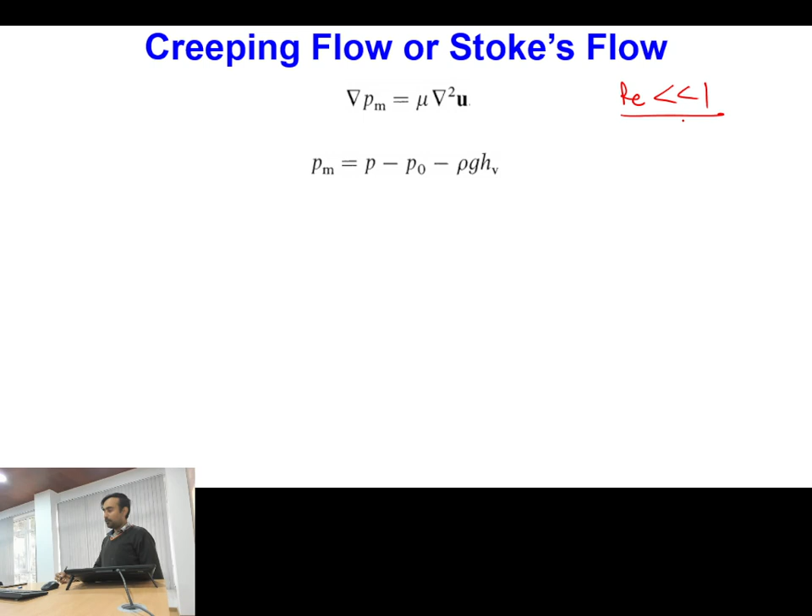So, a little bit of idea I already gave you in the previous class: if the Reynolds number of the flow is very small in comparison to 1, it means viscous forces are significant in comparison to the inertia forces, then particularly the advective terms of the momentum equation can be avoided, and we can simply write that the pressure gradient, particularly the modified pressure gradient, is directly equal to the viscous forces.

Okay, here the definition of modified pressure is included, and once we take the divergence of this equation, we get Laplacian of modified pressure is equal to 0, and once we take the curl of this equation, we get Laplacian of rotation field is equal to 0, and ultimately rotation can be written as minus Laplacian of stream function, and this gives the biharmonic equation where del 4 psi is equal to 0.

So ultimately, if I have creeping flow or Stokes flow, these are the names given for Reynolds number less than 1, and if this flow is over a sphere, then I can simply use the axisymmetric assumption, and under this assumption, because I can utilize the stream function, this single equation will be applicable as a replacement for the momentum equation, and continuity will be satisfied by default.

Okay, so now this equation we will try to apply for a rigid spherical particle. When I am talking about the rigid particle, I am particularly referring to a solid particle, because a fluid particle will always be a deformable particle, not a rigid one. So whatever analysis I am proposing here is applicable for a solid particle, because that will be the only rigid one.

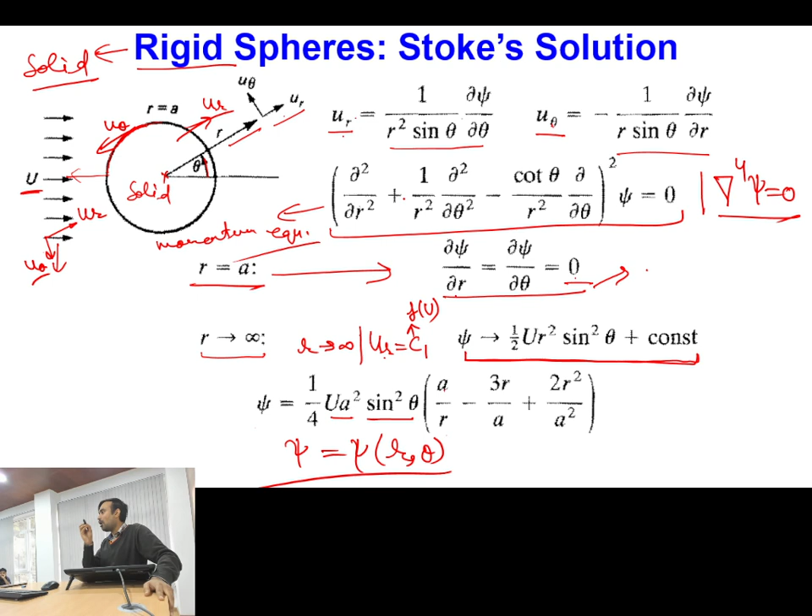So you can simply say that psi is becoming a function of r and theta. So in this equation, if I substitute different values of r and theta, then I will be able to determine the value of psi in the entire portion around this sphere, and then if I join all the points with constant value of psi, that will be giving my streamlines. Is this one clear?

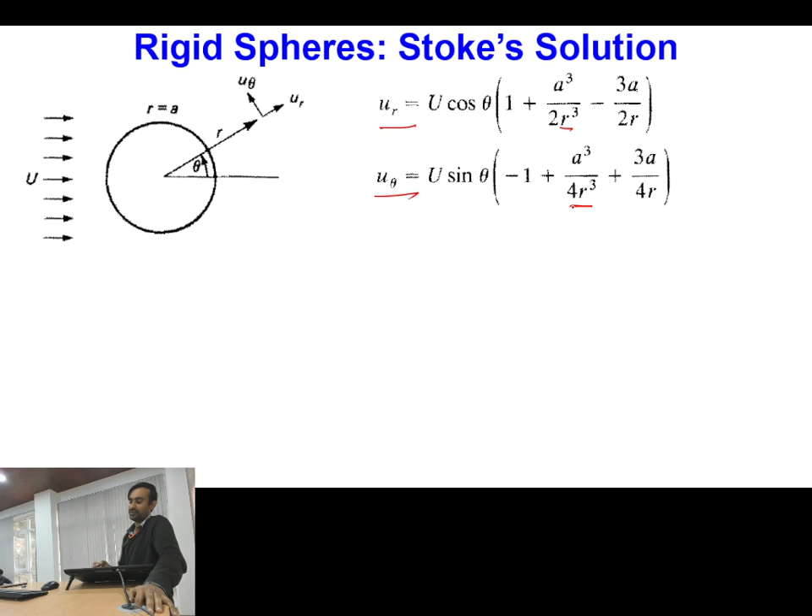Now, if you have got the value of this function psi in terms of r and theta, then you can take the derivatives del psi by del theta and del psi by del r, and then you can determine the corresponding values of radial and tangential velocities. So these radial and tangential velocities are also functions of r and theta. So at different values of r and theta, you now have the velocity field known.

Once you have the known velocity field, can you tell me how to determine the pressure field? How to determine pressure field? Continuity equation? No. We are not solving the continuity equation; that is by default satisfied for the stream function. So if I know this velocity field, how to determine the pressure field? Because this is a viscous medium, I cannot apply Bernoulli equation here. That is applicable for inviscid medium, irrotational flow.

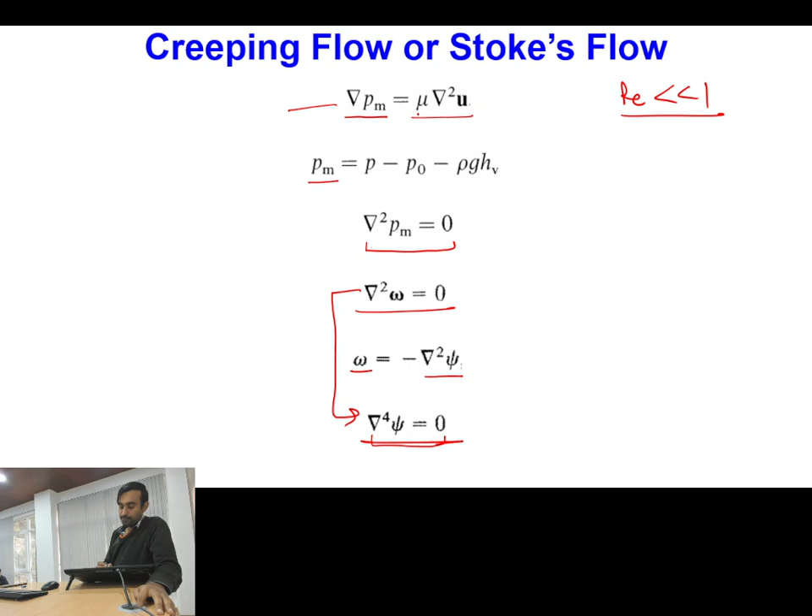Momentum equation, yes, correct. So if you now go to your original form of momentum equation, what was it? It was having mu times Laplacian of the velocity field on the right hand side, and on the left hand side it is the gradient of the pressure field. So if you know this velocity field, your right hand side is actually known to you. Once the right hand side is known, we can simply calculate the left hand side. Is this one clear?

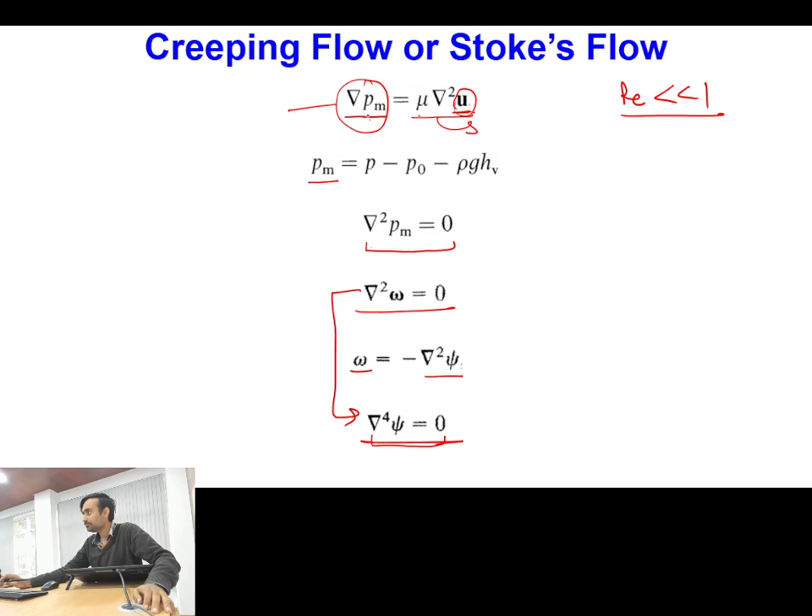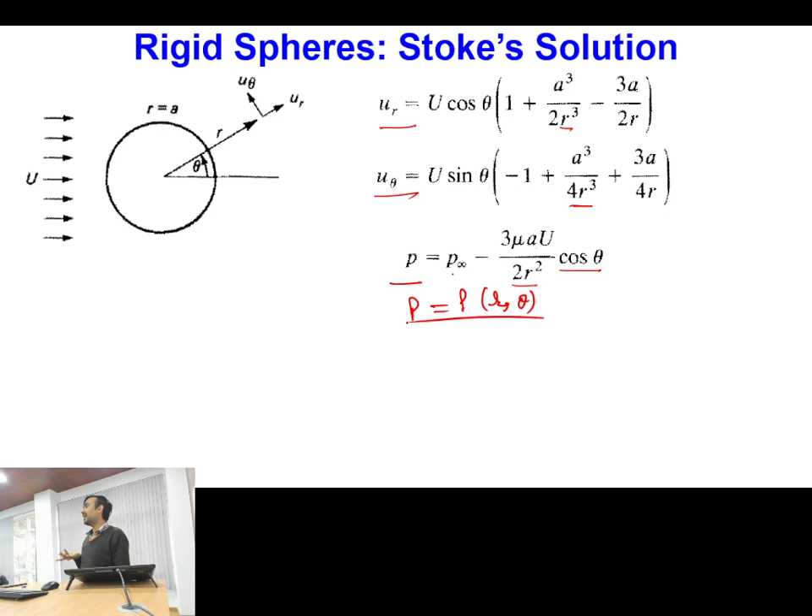So by using the original momentum equation, you can actually calculate the value of the pressure field, and if you calculate the value of the pressure field, it comes out to be P infinity minus 3 mu A u divided by 2r square into cos theta. So again you can see your pressure is nothing but a function of r and theta. Because our entire system is in r theta coordinates, at different values of r and theta I can also predict the value of pressure as well.

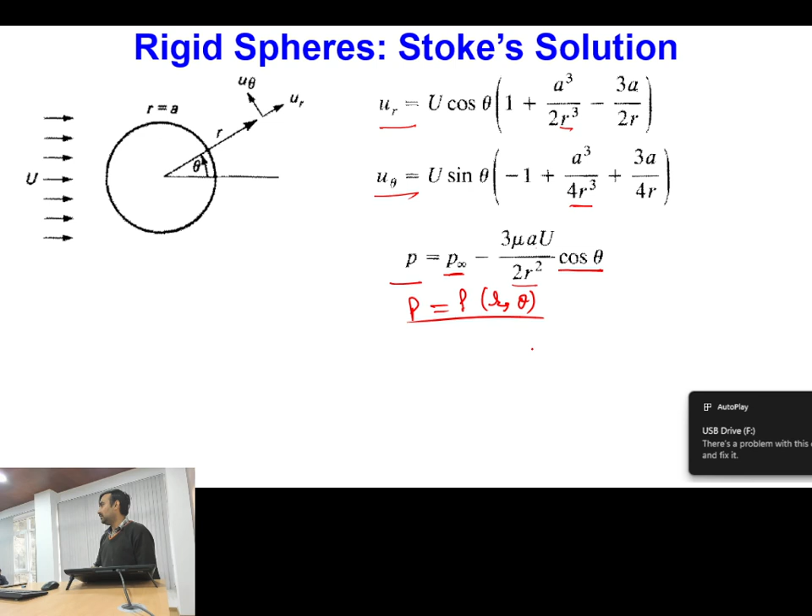This time, one distinction from the potential flow theory: you will be finding that here this pressure is nothing but an odd function. Because of this, pressure in this sector and in this sector will actually be different. Same or different? So this is an odd function, not an even function.

Cos theta from 0 to 90 degrees will be positive, and from 90 to 180 negative. So because of this odd function, you will have different values of pressure in the upstream and downstream directions. Once you have different values of pressure, it means you will be experiencing a net force because of the pressure term, which we call our form drag.

So now, this pressure will give you which type of drag force? This will give you nothing but form drag. And we have one more drag force. What is that? That is nothing but skin friction drag or viscous drag. So to calculate viscous drag, what do we need to do? We need to calculate the wall shear stress.

So in order to calculate the viscous drag, we need to calculate the wall shear stress. Of course in this case I can simply say wall shear stress. Otherwise, if I use the nomenclature of multiphase flow, I should call this interfacial shear stress, because this is a particle and this is the fluid. This boundary is the interface between the fluid and the particle, so I should know the interfacial shear stress.

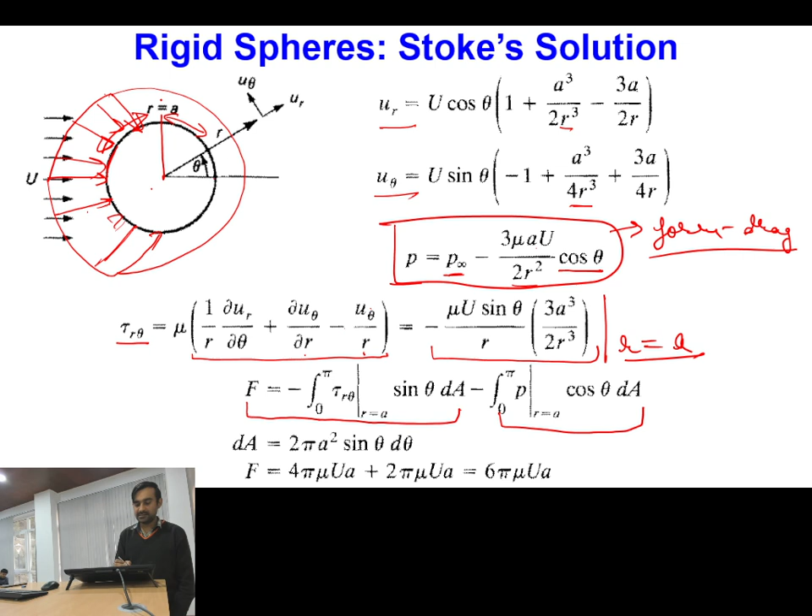So using the value of this interfacial shear stress as well as the pressure term, what can I do? Say I have some pressure distribution at this surface, something like this. It will be acting on the entire structure. So what will be happening? Pressure at every point is varying at different values of r and theta, and I know how pressure is varying. This function is nothing but a function of r and theta.

Now if I take dA as some elemental area, and corresponding to this elemental area I take the value of pressure and then its component parallel to the flow, because right now I am trying to calculate the drag force. When calculating the drag force, I consider the component parallel to the flow direction. So parallel to the flow direction, the component of pressure is the value of pressure at r equal to a, cos theta, times elemental area dA.

And I am doing this integration from 0 to pi, so for half of the portion actually. This portion gives me my form drag. Then similarly I need to do the integration of the interfacial shear. Interfacial shear multiplied by its component in the flow direction, multiplied by area, will give me my skin friction drag or viscous drag. And typically this elemental area dA over here, you can see, what is the area of a circle?

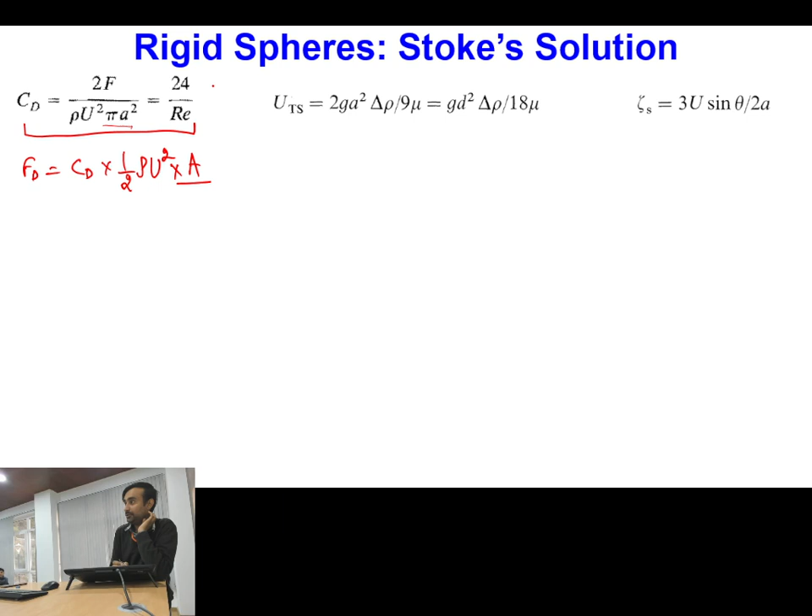So from here I can write Cd is equal to 2F divided by rho U square into pi a square. So you have the value of F as nothing but 6 pi mu Ua. So if you substitute this value 6 pi mu Ua and define your Reynolds number as rho U into 2a by mu, so if you take diameter as your length scale for estimation of the Reynolds number, then you will be finding your drag coefficient to be 24 by Reynolds.

Okay, and now what we need to do, we also need to estimate that if in the flow field, I am saying that the particle, either fluid or particle, is moving actually at constant velocity. So ultimately what is happening? Particle is not having any inertia in the creeping flow situation. So the only forces which will be coming into account are driving force and the resistance force. And resistance force is because of the pressure and the shear stresses, which is coming as drag force. Okay, and the driving force for the particle will be nothing but its weight.

Okay, so if I do the balance of weight and the drag force, what will be the value of weight? 4 by 3 pi a cube into density of the particle, but ultimately density of fluid is also coming into picture. So I have to take the buoyancy force. So when I do the buoyancy force, I will be writing delta rho into g. So this is the net driving force. When this net driving force is equal to the net resistance force, which is nothing but 6 pi mu aU, once I do the balance of these two forces, then ultimately I will be able to calculate

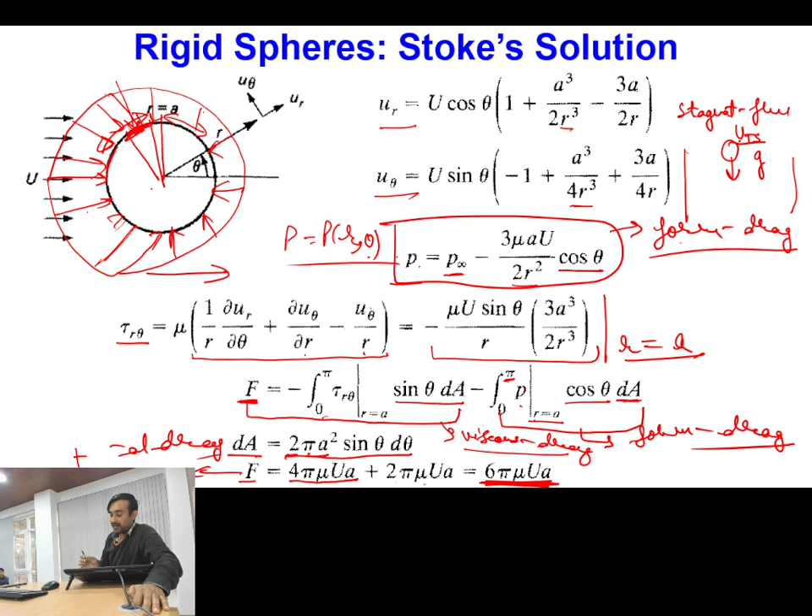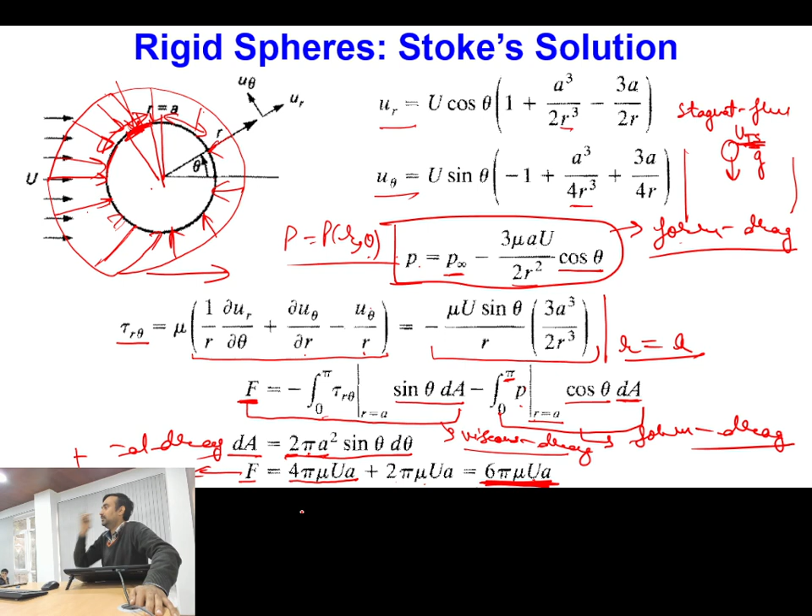Okay, so in this scenario, whatever drag force the particle will be experiencing, that will be 6 pi mu a u, but in place of this u I will be having uts. Is this point clear? So I am making an analogy from this to the free fall situation of a particle. Okay, is this one clear now? Are you clear with this idea?

So here this uts is the free fall velocity of the particle, which is a uniform velocity. Say you have an infinite fluid medium and you drop the particle at t equal to 0; first the particle will be in an accelerating mode, and after that it will achieve a constant velocity. I am not talking about the accelerating phase, only the portion once it has achieved uniform velocity. Corresponding to that, the terminal velocity of the spherical particle will be g d square delta rho by 18 mu.

And if you calculate the vorticity at the surface of the particle, zeta s is equal to 3u sin theta by 2a. Whenever I am talking about the surface of the particle, r is already substituted equal to a. That's why in this formulation you only see the variation of theta but not of r. Is this point clear? All are clear with these points?

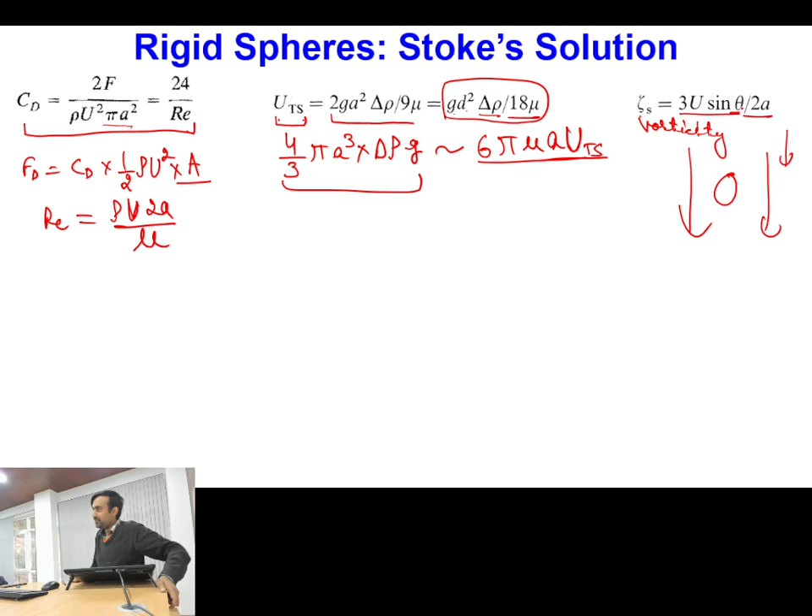So in the previous slide I discussed the case where you have a solid particle and fluid is moving over it at uniform velocity. When I defined the terminal velocity, I considered just the opposite situation: I have a stagnant fluid and the particle is actually falling. So the terminal velocity of that particle is shown over here. Okay.

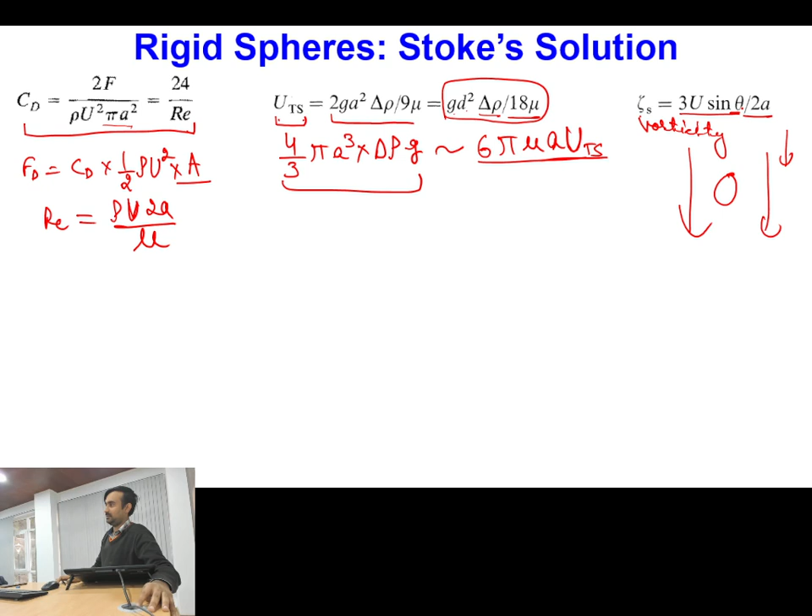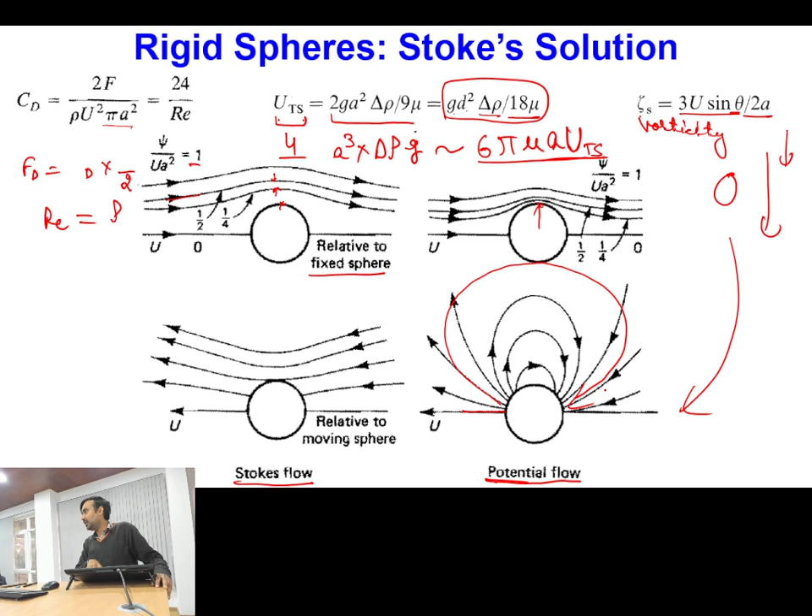Now, instead of this solid particle, if I have a fluid particle, it means that now my particle will not be purely rigid. So the particle can also have relative motion at its different locations. Once the particle is having different motions, then what will be happening? Other than the kinematic boundary conditions, now dynamic boundary conditions will also come into account.

So if we say that within the particle also some motion is happening, we now have relative velocity between this motion and the outside motion. If we have some relative motion, then ultimately there will be interfacial shear. And at the same time, if inside also I have a fluid, this fluid will be applying a certain amount of pressure and viscous normal stresses from inside, and outside also I will be having certain pressure.

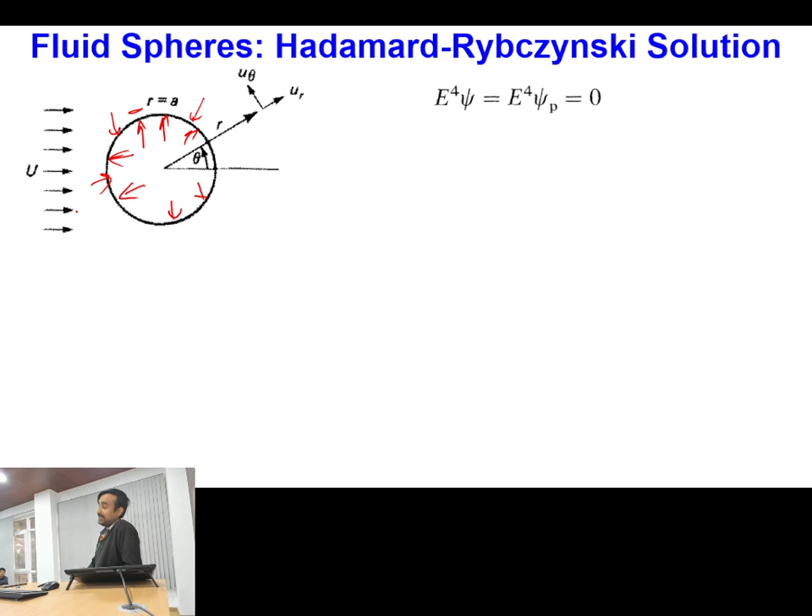So this difference of pressure, meaning the forces acting normal to the interface, should also be taken into account. Because if these forces are not considered, then we cannot ensure that the shape of the particle can remain the same. Is this point clear? So now in place of the solid particle, we have the fluid particle. So we have additional complexity that along the interface of the particle we have to balance the tangential and the normal forces. These two additional boundary conditions we have to satisfy.

Okay. So considering this, again the same thing is there. You can see this E symbol is nothing but a replacement of the symbol delta, because these equations are taken from different texts, so the nomenclature is also coming from different books.

Okay, so now one important point: whenever I am writing this equation delta four psi equal to 0, I am not writing it solely for the continuous medium. I have also written psi p. It means that within the particle also there will be some flow field. So I have to define psi for both the particle as well as for the surrounding continuous medium.

Okay, so this solution was independently done by Hadamard and Rybczynski. These two persons initially did this solution independently, but it is now commonly joined with their names, because they did this solution at almost the same time.

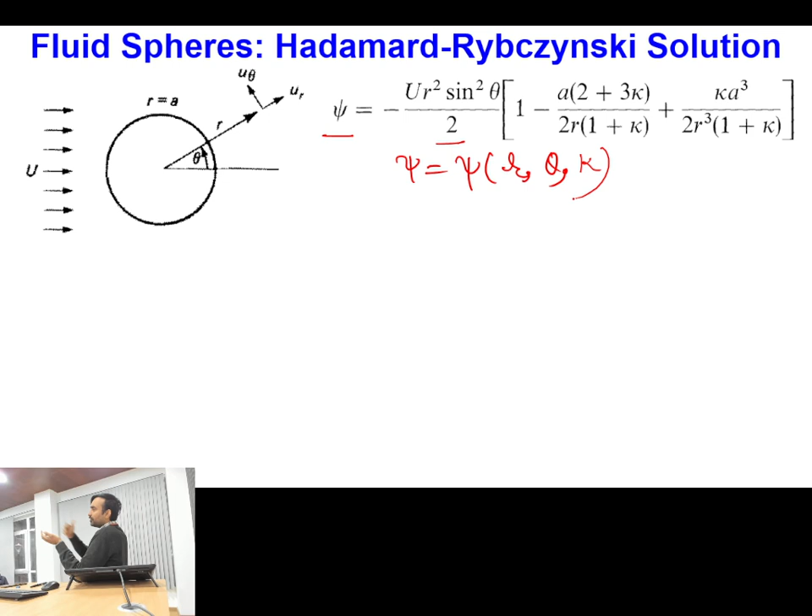Now psi is a function of r, theta, and one more variable, that is k. What is k? K is nothing but viscosity ratio. Because with different fluid combinations, the viscosity of the particle and viscosity of continuous phase can be different, and depending upon that your value of k will be different. Is this one clear?

Similarly, I can also solve this equation within the particle. Whatever solution of psi I get within the particle, I will be writing as psi p. Is this one clear? So I am solving psi outside the particle as well as within the particle. Okay.

If I have these two, then how can I find pressure? Using the fifth boundary condition. So one way is I can calculate pressure using this fifth boundary condition. Other than this, can I find pressure some other way? Yes, I can go back to my momentum equation, and from momentum equation also I can find the pressure. Why am I saying this? Because here we have one very important conclusion.

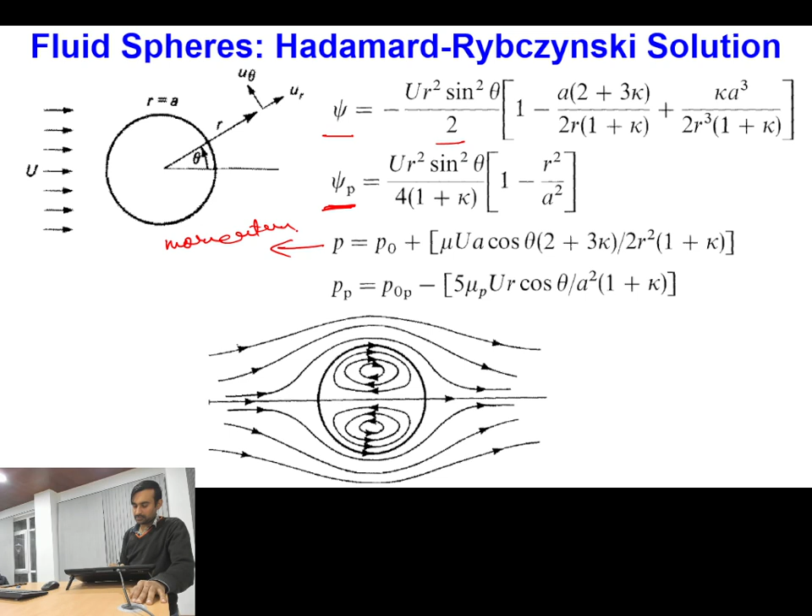So one pressure I can calculate from the momentum equation, and one pressure I can calculate from the fifth boundary condition. Is this one clear? Now, my surface tension pressure was considered in which boundary condition? The fifth boundary condition. And all other 4 boundary conditions nowhere involved the value of surface tension.

But the solution we are calculating is subject to the boundary condition that there is no flow across this interface. If I don't have any flow across this interface, my shape of the particle is remaining intact. So for smaller particles to be of spherical shape, surface tension does not matter. Whether surface tension is small or large, the shape of the particle can stay spherical. Is this one clear? Is this making sense?

And at the same time, if the pressures calculated without considering the surface tension and with considering the surface tension are matching, then I can say that surface tension is not leading to any change in shape of the fluid body. Are you getting this point or not?

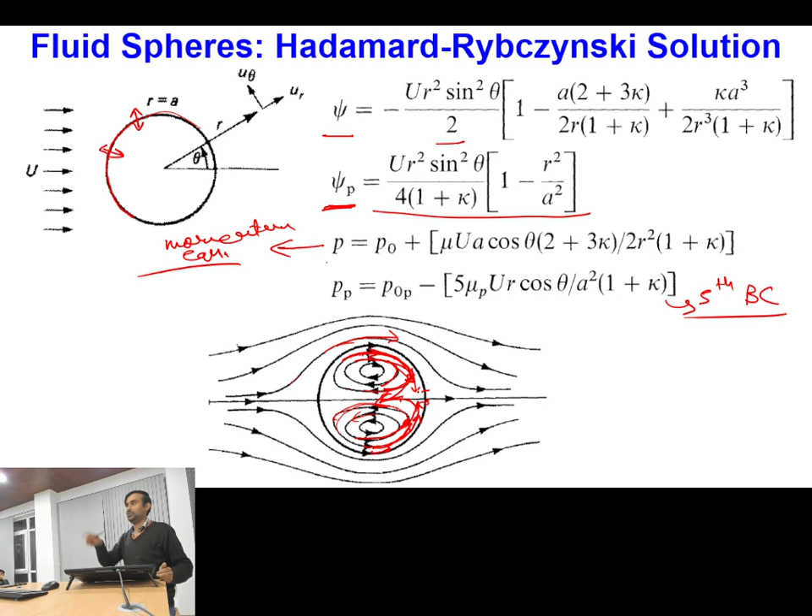So here you can make the comparison for different values of viscosity ratio. So K is 0. K was nothing but mu P by mu, where mu P is particle viscosity. So K = 0 means your continuous phase viscosity is extremely high in comparison to particle viscosity. You can consider this like an air-water system: say you have an air bubble and outside you have water as liquid. Air viscosity is very low in comparison to the viscosity of water, so you will be having this type of system.

So if you increase the value of K, what is happening to your flow field actually? That is shown over here. Is this one clear? What is shown here? Can you observe these streamlines and then tell? If you see this portion, the internal circulation pattern is almost the same. But if you see outside, this gap is actually more widened in comparison to this gap. So you have different surface curvature upon change of the viscosity value.

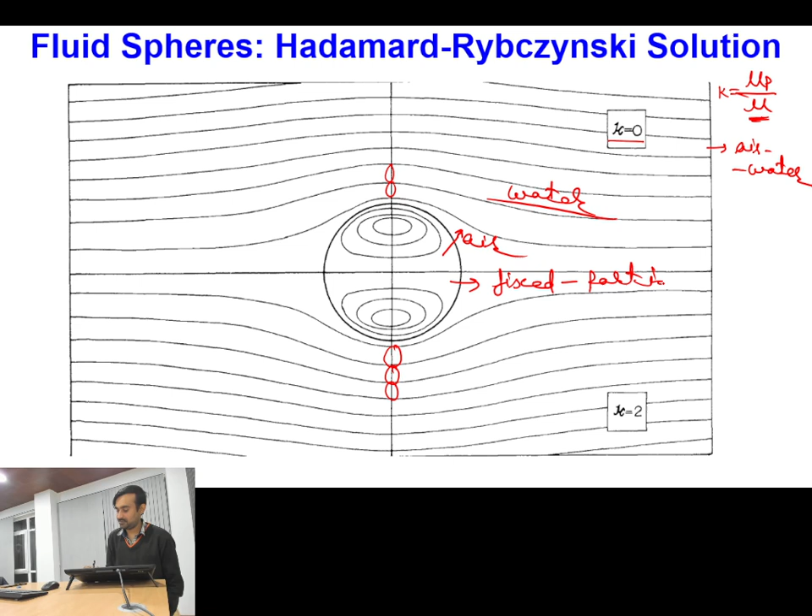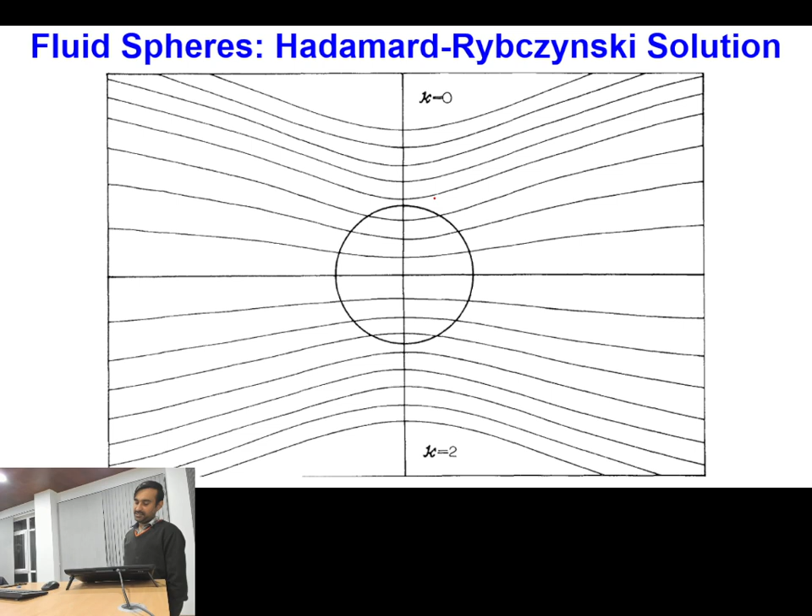You use different fluid pairs. First you take an air-water system, then air-glycerine, then any other immiscible fluid medium. Just change the properties between the fluids. So this was for a fixed particle, and flow is happening over the particle. If you have the other situation where your particle is actually moving and in the surrounding you have stagnant fluid, then you will find streamlines something like this. Then one interesting point.

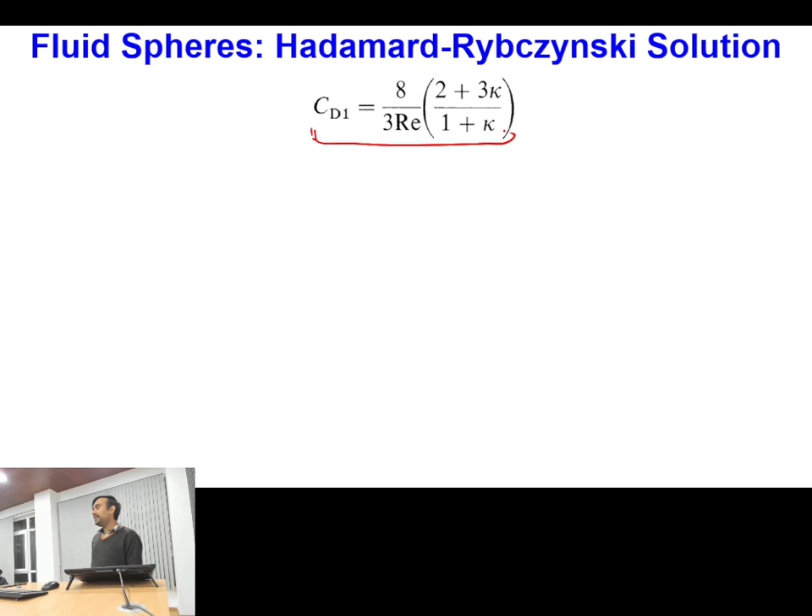Now what we need to do? We need to calculate again the drag forces. If I calculate first the form drag, I can calculate it from the pressure distribution. And if I write form drag divided by half rho u square, that will be nothing but my CD. So this I am calling the form drag coefficient, CD1. CD1 now has one addition: the viscosity ratio K is also taken into account.

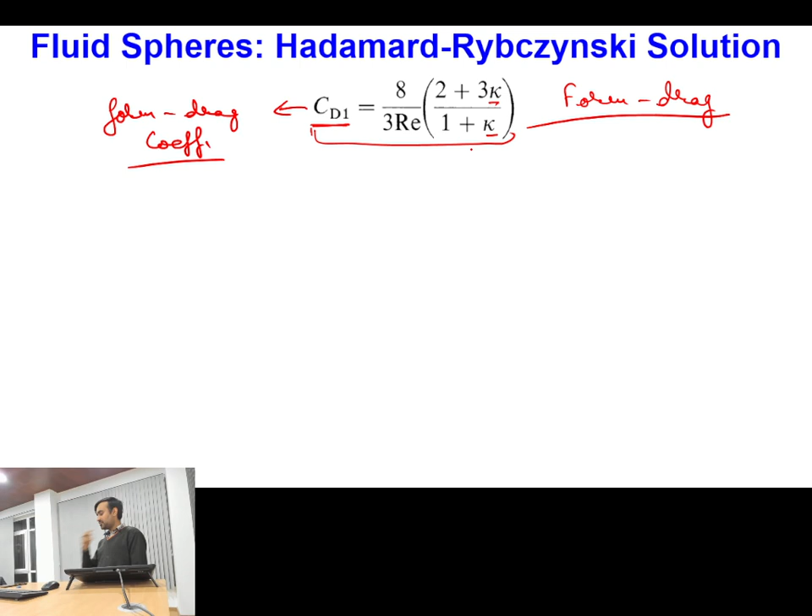Then this is CD2. CD2 is nothing but the normal component of viscous drag: viscous drag due to the normal portion of the deviatoric stress tensor. Then third, I will be having purely because of the shear, so that is viscous drag due to the shear component.

Now my total drag coefficient will be something like this: 8 by Reynolds number times (2 + 3K)/(1 + K). If the value of K is equal to 0, or infinity, what will happen? If K is equal to infinity, it means particle viscosity is infinite, so it is identical to a solid particle. Then this limiting case becomes 24 by Reynolds number, and this particular component will actually vanish. I will have only the drag force because of the tangential component and the pressure component; the normal stress will not contribute. This is just a limiting case.

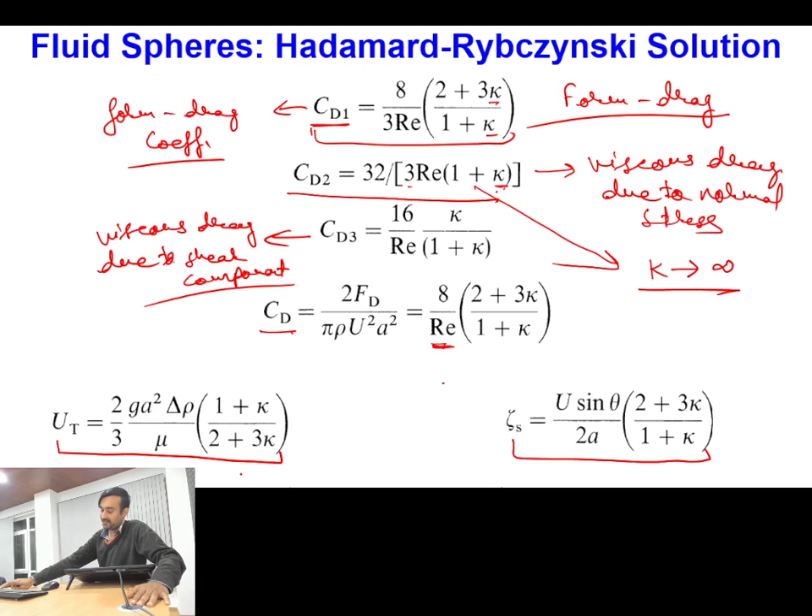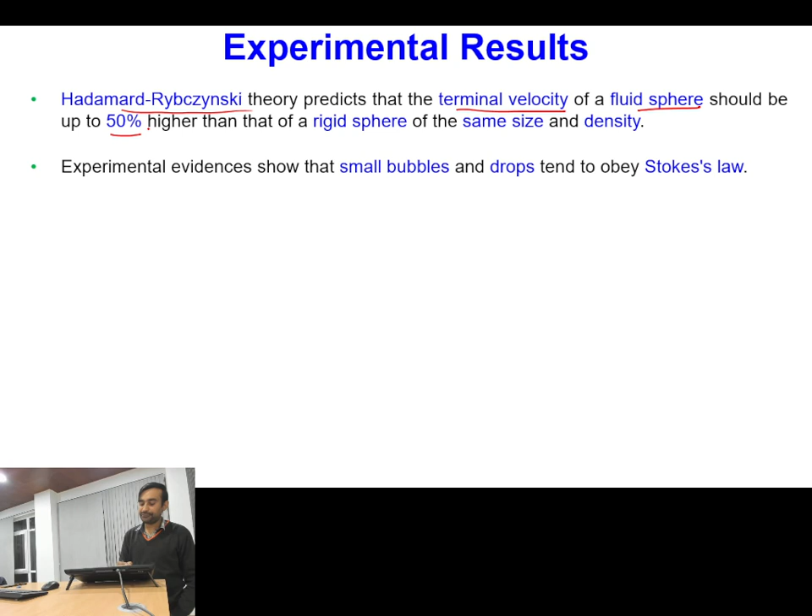So for a fluid particle, the Hadamard-Rybczynski theory predicts that the terminal velocity of a fluid sphere is almost 50% higher than that of a rigid sphere for the same size and density. So if you use a spherical fluid particle or a solid spherical particle having the same size and density, the fluid particle should have more velocity than the solid particle. And what is responsible for more velocity? Internal circulation is responsible, because it is favoring the flow direction, in contrast to what is happening in the case of a solid sphere.

In case of solid sphere, when fluid is moving across the interface, then fluid velocity just at the interface is actually exactly becoming, yes, relative is 0 in both cases. Okay, relative is 0 in both cases, but if you see, the particles of the fluid medium are actually moving through these vortices. So these will be favoring and decreasing the interfacial shear.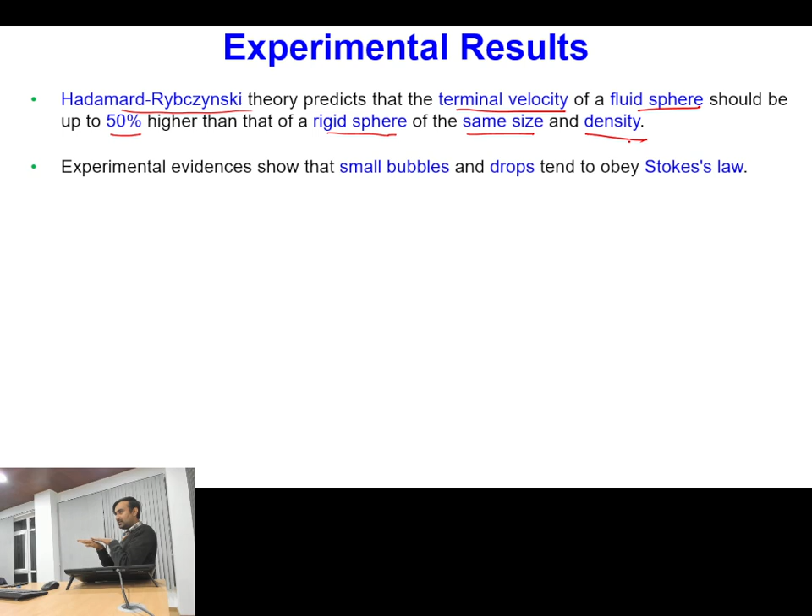On contrary, if you see in other case, particles are rigid, so there you will be experiencing more resistance. Okay, so it means internal circulation is responsible for decreasing the drag force and increasing the velocity. So internal circulation present in fluid particles is responsible for decreasing drag force and increasing the terminal velocity.

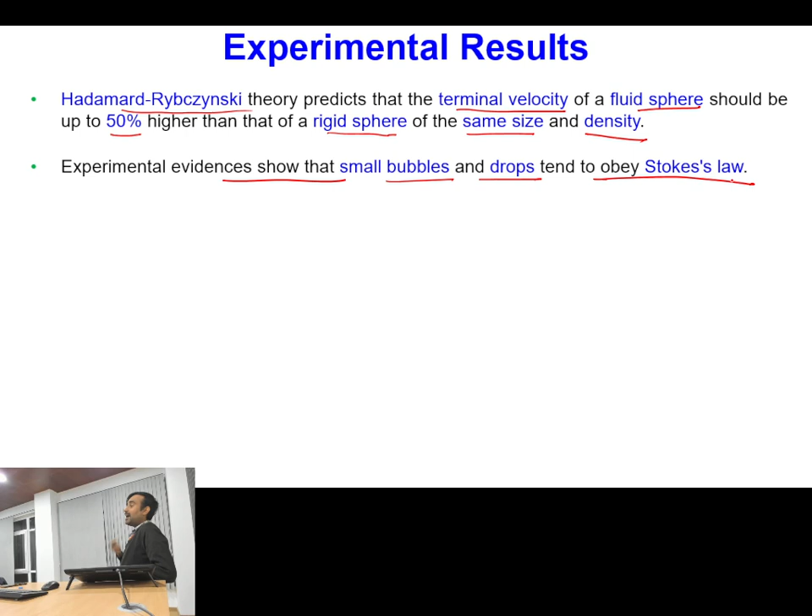Then second point is, this is very important observation. Experimentally it is observed that small bubbles and drops tend to obey Stokes' law. So theoretically we are getting that this should have higher velocity, but experimentally whenever the measurements are done, it was found that the value of velocity is actually more approaching towards the Stokes result. Okay, so now what can be the difficulty?

Yes, if internal circulation is not happening, or there is some deviation in the internal circulation from its exact structure. Okay, so what are the possibilities of deviation? Yes, this is very important point. So whenever we have derived this solution, we considered that interface should be surfactant free, contaminant free. But in real scenarios, every time we will be finding that interface is not actually contaminant free.

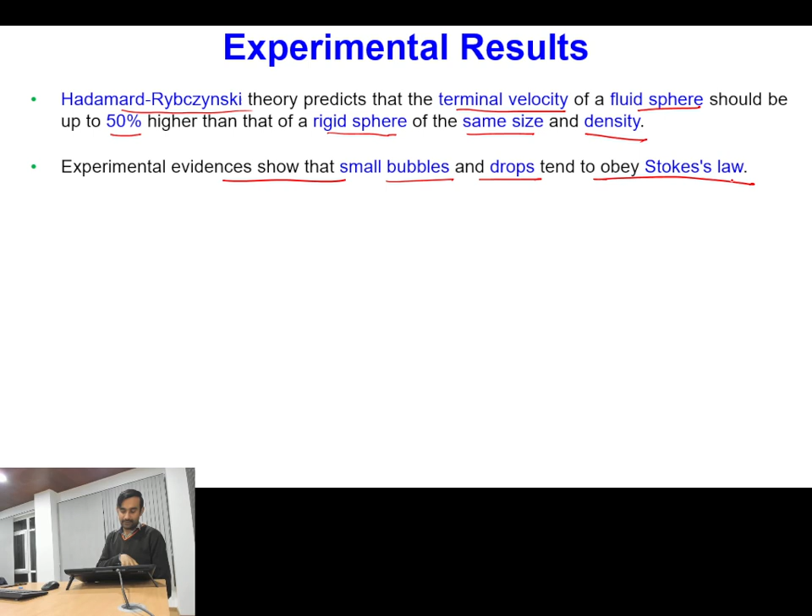So once the interface is not contaminant free, then what will be happening? The internal recirculation pattern actually will be disturbed. So once we have disturbance in the internal recirculation pattern, of course, it will be actually leading to changes in the value of terminal velocity. Okay, so there are 3 different postulates which have come to explain this anomaly.

So first postulate was given by Bond and Newton, and they mentioned that in case of small fluid particles, they follow Stokes' law, but when we increase the diameter, the velocity approaches towards the Hadamard-Rybczynski value. Okay, so it means upon increasing the diameter, they are saying that these are approaching towards this value. So what was their hypothesis?

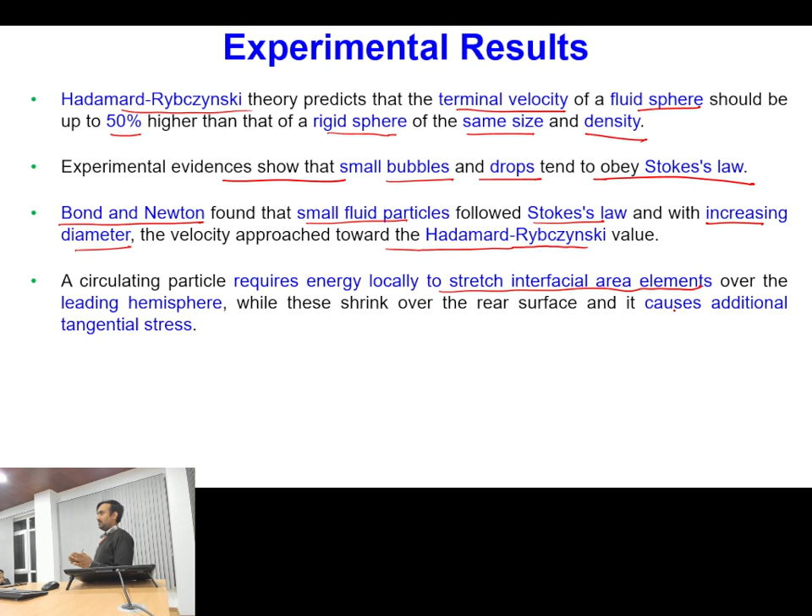Their hypothesis was that a circulating particle requires energy locally to stretch the interfacial area element. So interfacial area element will remain in its stretched position once the internal circulation is investing certain amount of energy in maintaining its free surface, its interface shape. So once this energy is being invested, it means we will be having some additional tangential stresses.

So this was the first theory, and based on this theory this criteria was given the name Bond criteria: if my Bond number is greater than 4 for a fluid particle, then only it will be having Hadamard velocity, otherwise it will be approaching Stokes velocity. Okay, so though this particular criteria was having sufficient accuracy, there were certain cases where this criteria actually was not working.

People have done some specialized experiments where they have given ultimate care to make the interface surfactant free, contaminant free. So in that pure case, even if your bubble or drop Bond number is less than 4, they were approaching the higher velocity. Okay, so that's why in certain cases this theory was not actually working.

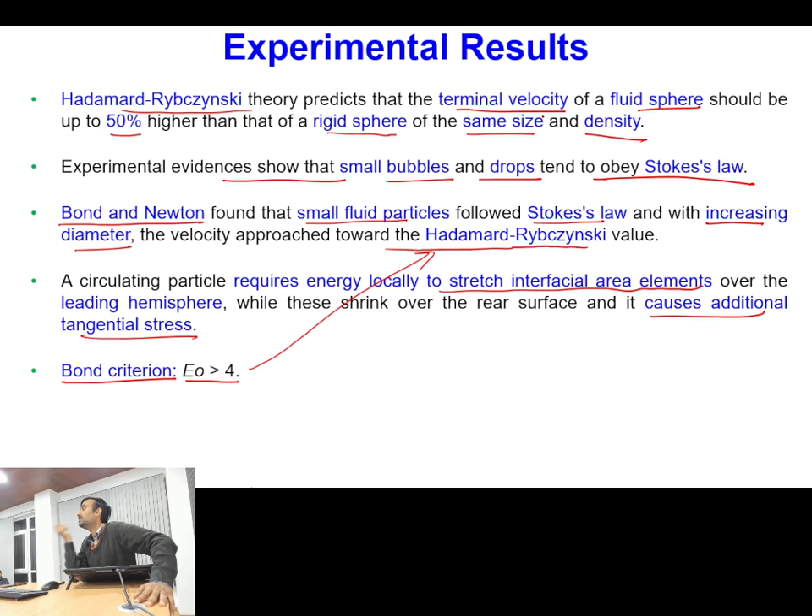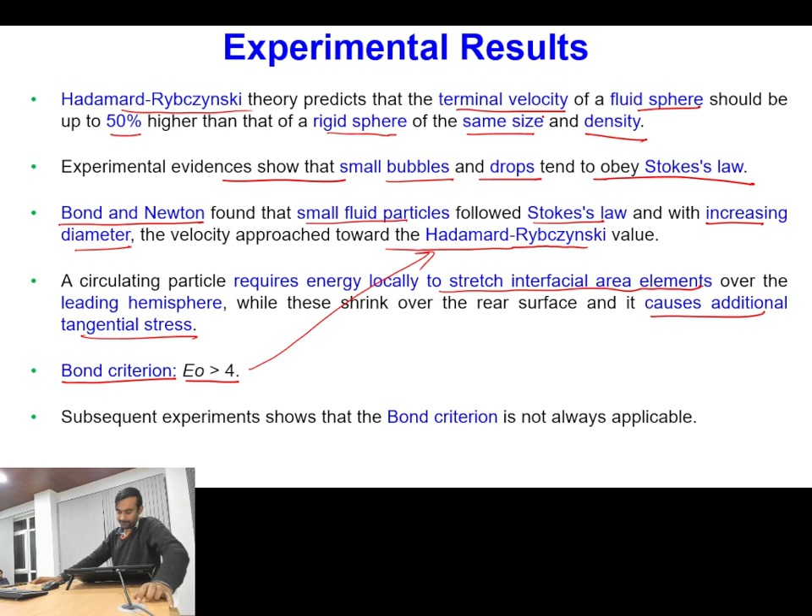And in certain cases, people have actually added impurities from outside, such impurities which are not changing the surface tension. For example, some known solid particles were added which cannot change the value of the surface tension. Okay, so with these particles it was observed that there is no change in the value of velocity. So it means size is not a strong criteria. So then it was concluded that Bond criteria is not always applicable for all cases.

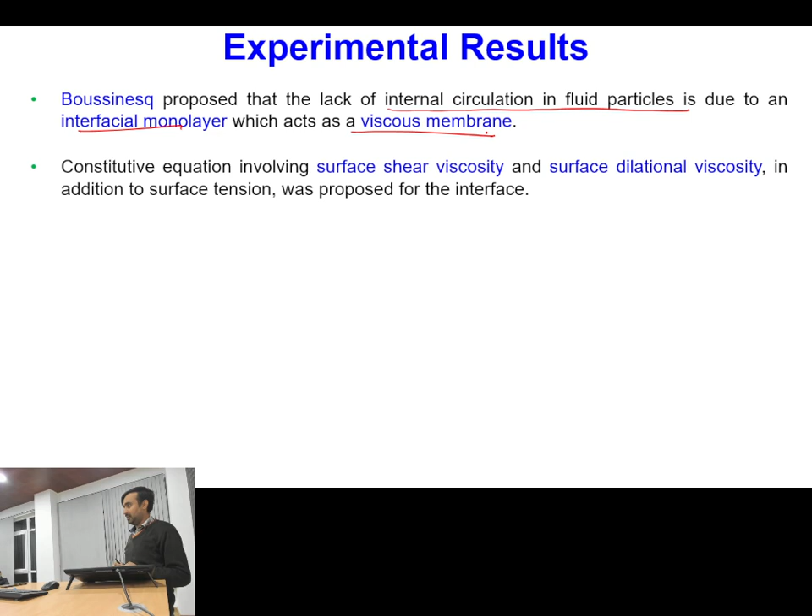Then subsequent research was done, and Boussinesq proposed lack of internal circulation in fluid particle due to interfacial monolayer. So it means at the interface we have formation of some viscous layer which is allowing some particles very close to the interface to remain stationary. And only surface tension cannot explain the complete interface rheology, but some additional viscosity should be accounted for, which is called surface shear viscosity.

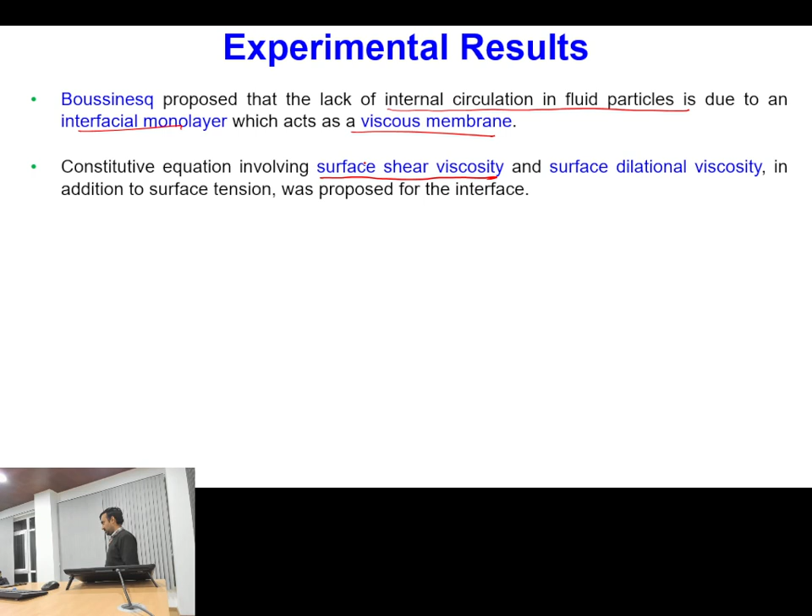Okay. By considering this surface shear viscosity, they have given the value of terminal velocity. So this was identical to that of the Hadamard relation.

Only one addition was C by mu, where this C is nothing but equal to the surface dilatational viscosity divided by 1.5 times the radius. So C means some factor which is accounting for the additional viscosity layer at the interface.

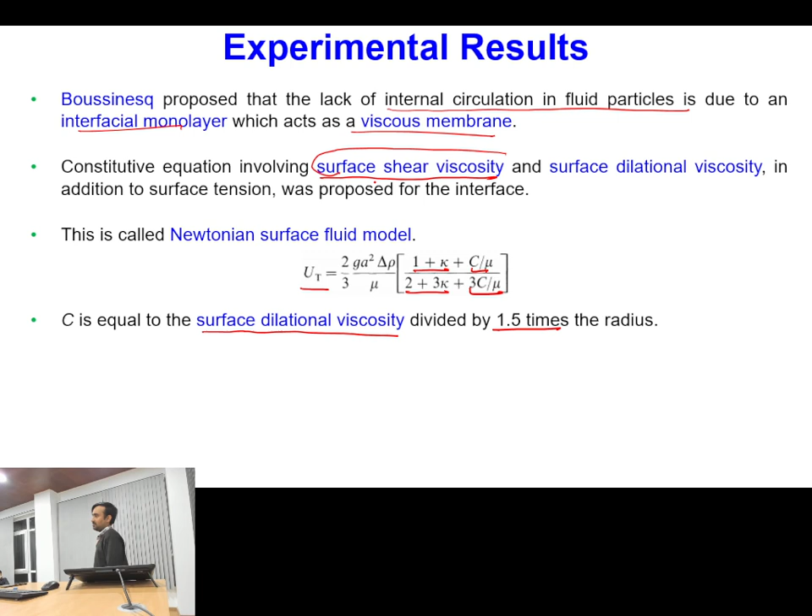So this was the second theory, but this theory has not become very popular because it is not very easy to determine surface shear viscosity. Surface dilatational viscosity is not very easy to calculate, so it was difficult to make reliable measurements of the surface dilatational viscosity.

So another theory came which mentioned that if we have some surface active substances present on the interface, then these substances tend to accumulate at the rear portion of the interface, thereby reducing the surface tension. So if you have some particles present in the medium which are not soluble in the bulk fluid medium, where will these particles settle? These will settle at the interface.

If you have some particle within the fluid medium which is not soluble, it will try to move away from the bulk of the medium and get accumulated at the interface. So once particles are collected on the interface, and this drop starts moving in the upward direction, what will happen? These leading particles will be displaced to the rear end.

So you will find that the top portion will be particle free, pure, and in the rear portion you will have accumulation of the particles. Is this point clear? Once this interface starts rising upward, the leading edge will have some recirculation, so the particles will mostly accumulate near the back portion. So the top portion will have high surface tension and the back portion will have low surface tension.

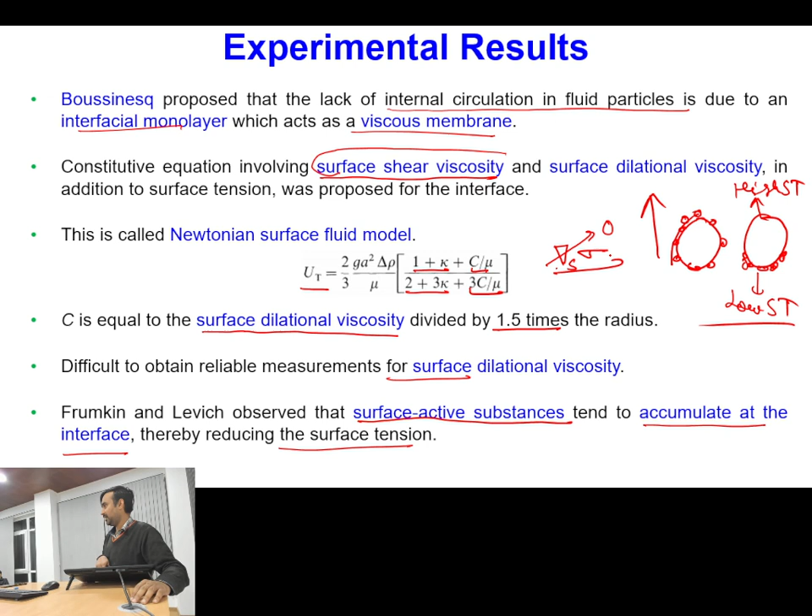So if you have this difference of surface tension, then in our theoretical analysis, the term in one of the boundary conditions, del S sigma, that we made 0, is not a correct assumption. We have to account for that variation of surface tension. It was found that these surface active agents are swept to the rear portion, leaving the frontal portion relatively uncontaminated, and the gradients are more pronounced in small bubbles and drops than in larger bubbles.

So the gradient of the surface tension because of the accumulation of the particles is not much stronger in the larger particles, but in smaller particles these gradients are stronger. That's why smaller particles, because of this gradient of surface tension, slow down and approach velocities close to the Stokes velocities.

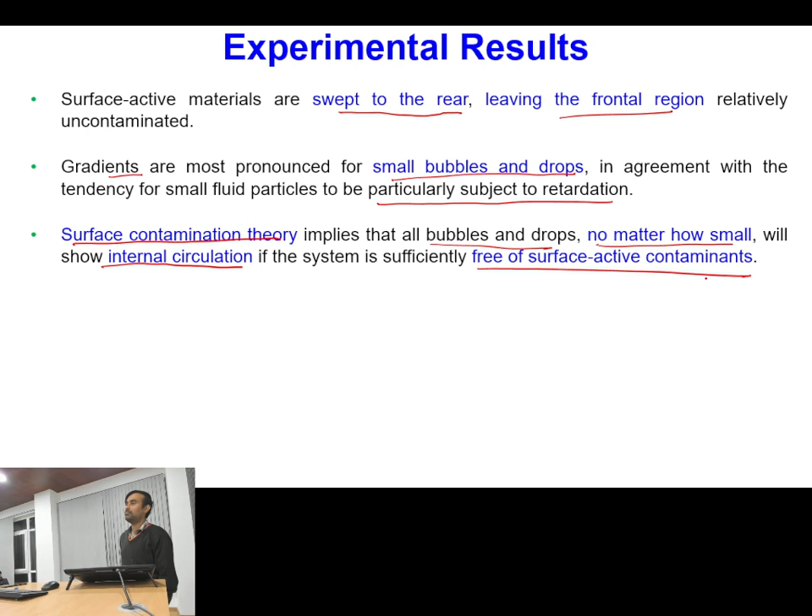And so surface contamination theory tells that for all bubbles and drops, no matter how small, we will have internal circulation if the system is sufficiently free from contamination. When people made pure contamination-free systems, or included particles which do not interfere with the surface tension, they were able to see the formation of symmetric rolls.

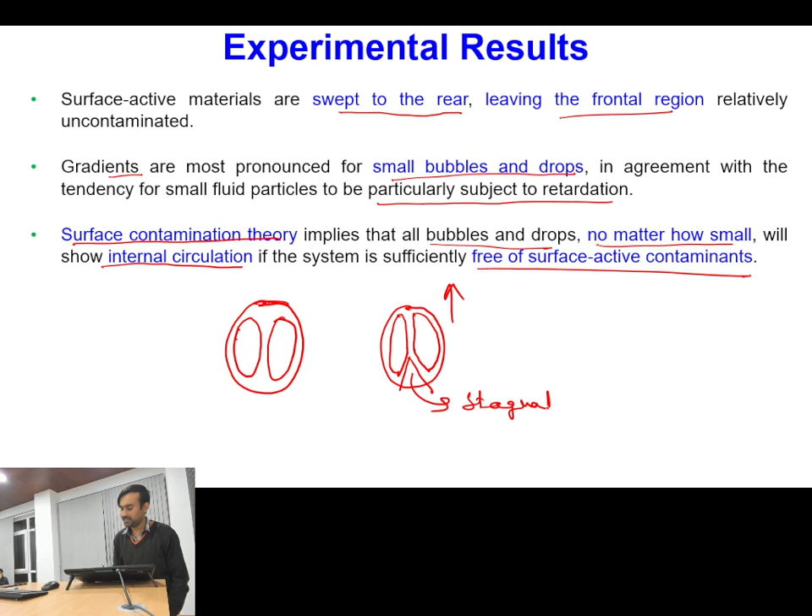But when contamination was introduced intentionally, it was found experimentally that if this is moving upward, the roll formation is something like this. So here you have some stagnant fluid portion. The fluid particle has recirculation, but that recirculation is deflected from its rear end and bends like this, and you have some portion behind this bubble where there is stagnant fluid.

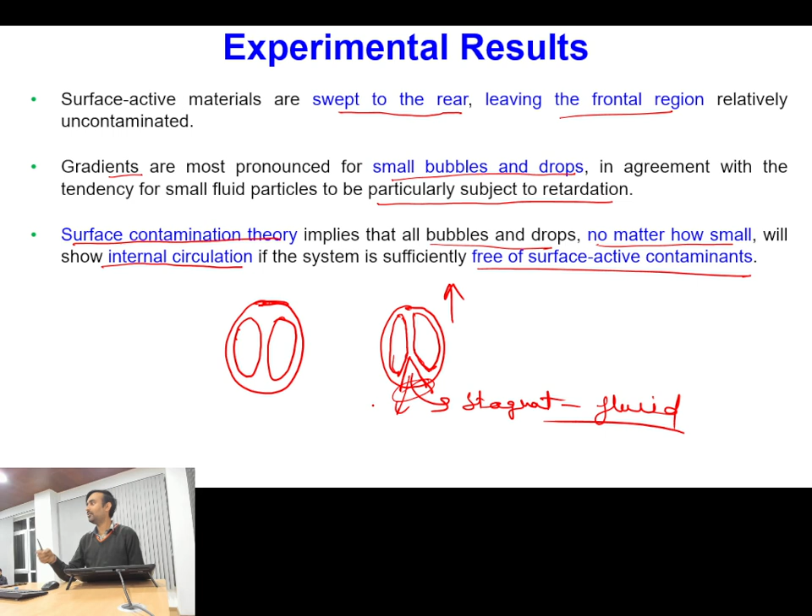So that stagnant fluid is responsible for the increased forces, leading to retardation of the bubble velocity. How this surfactant effect can be taken into account through mathematical analysis, we will discuss in the next class. Is this one clear? We can take this into account through some mathematical equations that we will discuss in the next class.